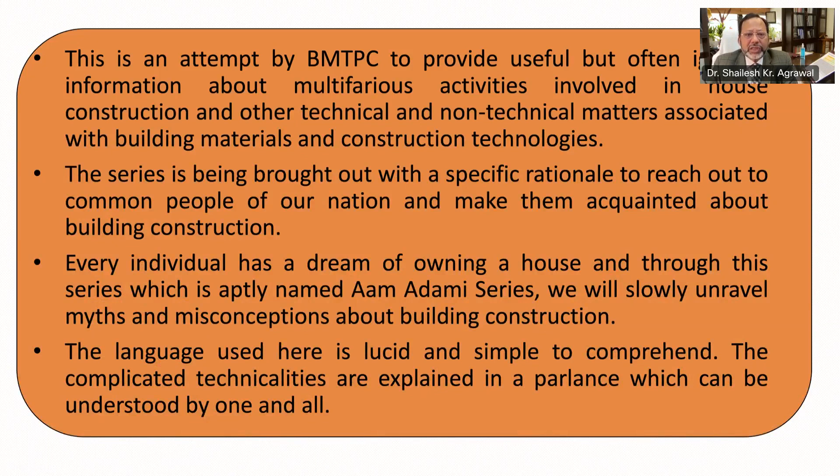Through this building digest series, BMTPC is making an attempt to create awareness about the various facets of housing construction by owners. As explained in the previous slide, construction of house is a multidisciplinary task involving a large number of professionals and non-professionals in the field of construction besides the owner. Therefore, it is important to have qualified experienced professionals on one hand, and on the other hand, supervise the work properly as it is being executed by a set of skilled as well as unskilled workers at site.

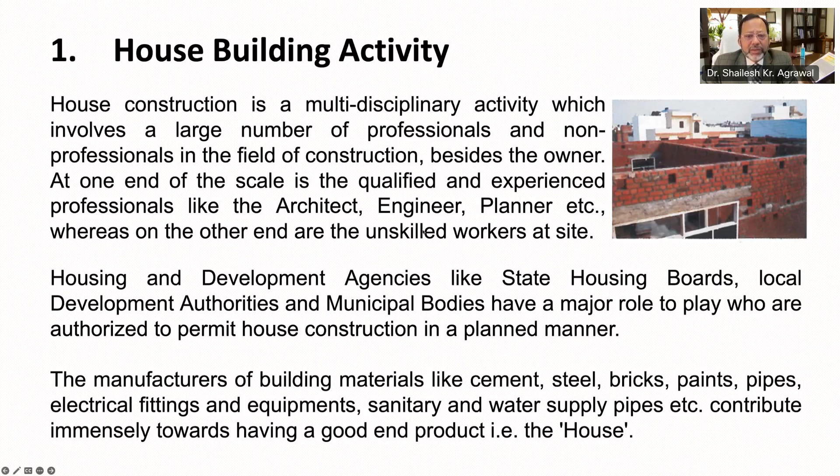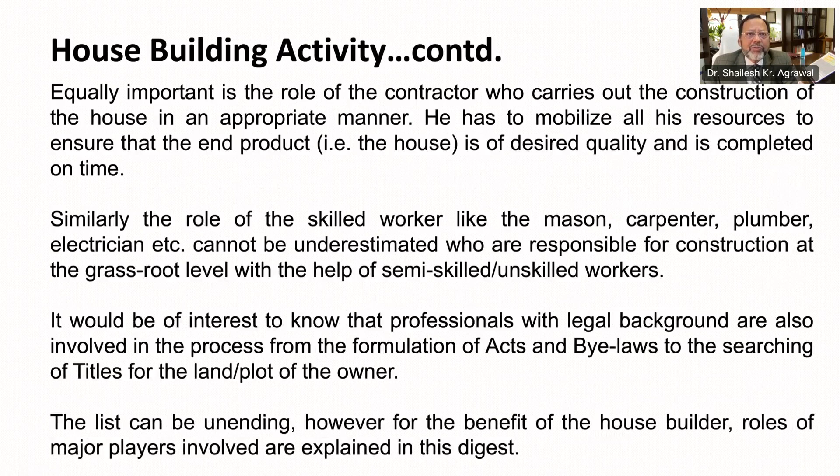Also, it is important to use good quality branded building materials such as cement, steel, bricks, paints, pipes, fittings, equipment, sanitary and water pipes, preferably of ISI mark, so as to give a good end product, that is your house. The role of the contractor, which we hire for construction, has an equally important role to play because he has to mobilize his resources to ensure timely completion of desired quality of house. Also, skilled workforce like mason, carpenters, plumbers, electricians has a very important role to play with the help of semi-skilled, unskilled workers.

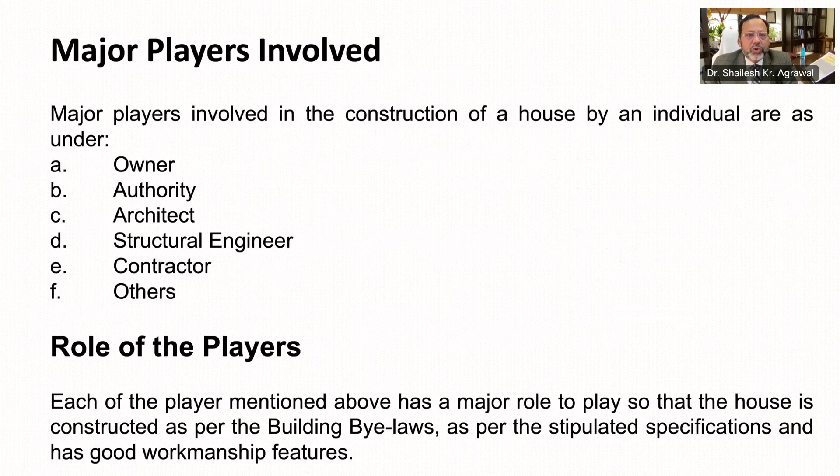Let me briefly explain each player's role to all of you. First is the owner, that is we ourselves. Owner is the key person, and therefore the owner has to ensure that he has the legal right over the plot of land over which the house is to be constructed. Also, the owner has to coordinate with all professionals and people involved right from the planning and construction stage with a view to obtain building approvals, other permits, completion certificate, and its occupancy.

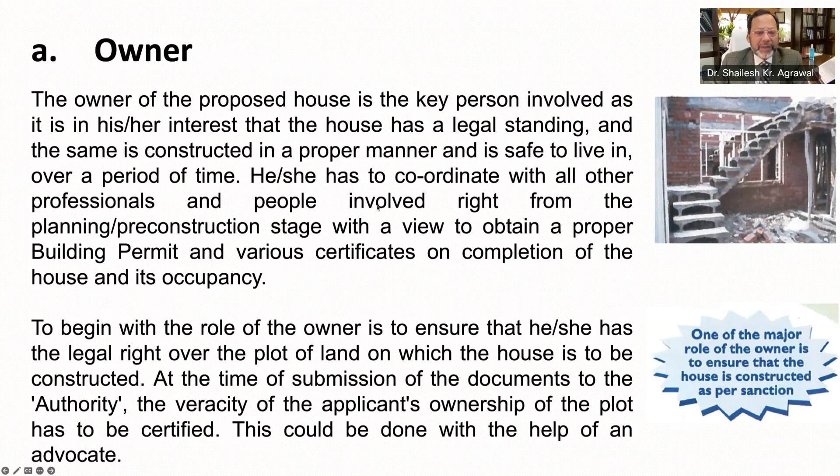The selection of architect also lies with the owner, and it is important to have an experienced and professional architect. The civil engineer or structural engineer is also required, and the responsibility lies with the owner for selection of a structural engineer. Also, the contractor, supervisor, and other personnel are required to be selected by the owner. It is important to note that the owner should ensure safety at his or her site and shall not cause inconvenience to others in terms of noise, dust, etc.

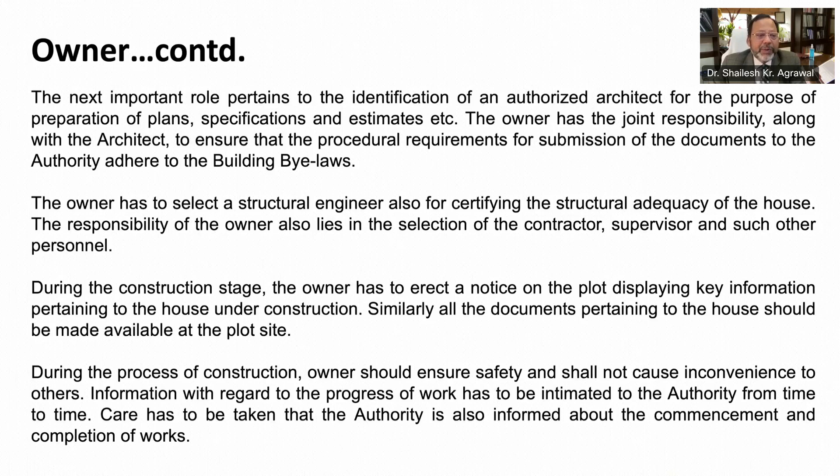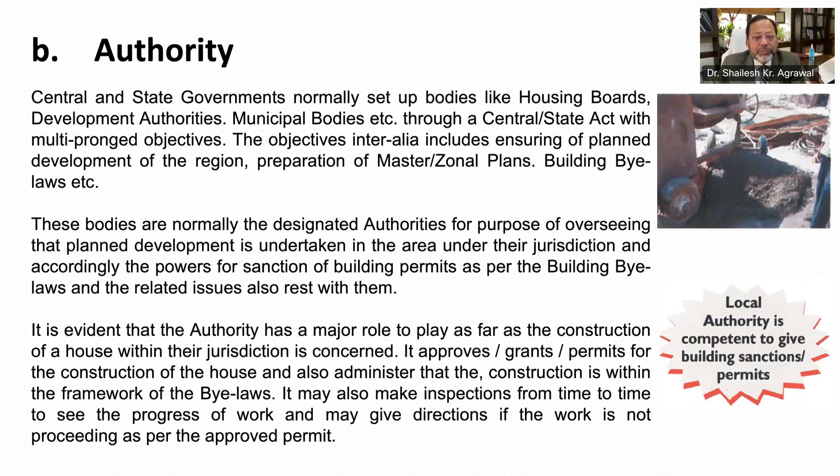The next player involved is the authority, which means housing board or development authority or municipality, as the case may be. The rules and regulations prescribed by authority need to be followed religiously. It is often seen that owners try to bypass these rules. However, let me remind you that these bodies are set up through central and state acts and are responsible for planned development of area, and they have jurisdiction and power for sanctioning building permits as per building bylaws, and at the same time issue notice to stop the work if not done in line with the building bylaws. Therefore, authority has an important role to play in construction of house. Also, they may make inspections from time to time and give directions.

To obtain a building permit, the housing plan and other documents along with fees need to be submitted to the authority. Normally, the application is scrutinized and building permit is granted within a stipulated time frame. The details of documents to be submitted, forms, etc. are easily available nowadays online.

Another important aspect is that authorities have an impaneled list of architects, engineers, advocates, construction engineers who are eligible to facilitate the construction process and sign the application and other documents along with owners. Remember, authorities are authorized to impose penalties as well if the work is not done properly.

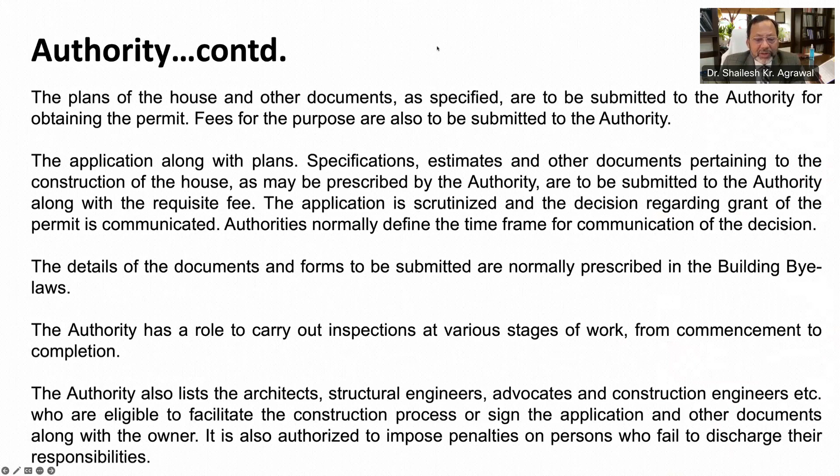The next person is architect. Architect is defined as a person who makes architectural plans and workable drawings for your house and also helps guide through the building construction and suggests different fittings, products, etc.

Architect has multiple roles to play, such as supervising the construction, preparing the plan as per requirement of the owner, and facilitating submission of application and its approval.

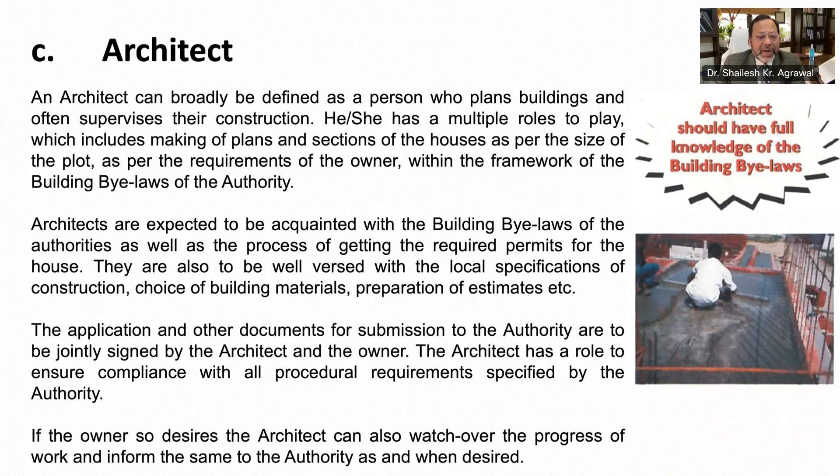The architect should also be well versed with the local specification of construction, choice of building materials, etc. Normally, ensuring compliance with all procedural requirements specified by local authorities, along with information regarding progress, lies with the architect along with the owner.

It is seen that architects normally hire civil engineers who help them carry out structural design of the house. Let me clearly tell my viewers that structural design is different from architectural design.

Architectural design is all about actual forms and shape of the house, that is plan, elevations, sections, whereas structural design is about sizes of foundations, beams, columns, slabs, along with number of steel bars required.

Normally, the structural design is done through structural analysis and is a must for making your house strong, stable, and safe from natural hazards. On account of recent recurrent earthquakes and resulting damages to houses, authorities nowadays require a structural engineer to authenticate the structural safety of the house being constructed.

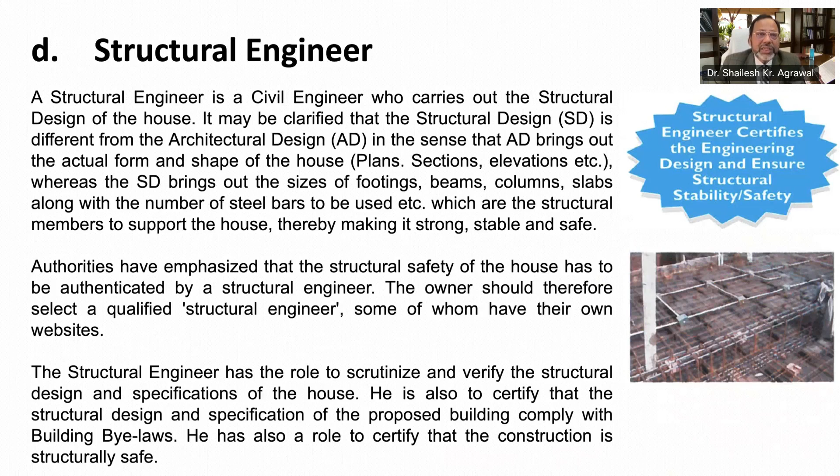Therefore, the structural engineer has a role to scrutinize, verify, and certify the structural design and specification of the proposed house, complying with building bylaws. The structural safety certificate also needs to be given by the structural engineer.

The next most important person for house construction is the contractor, who has a wide range of roles, duties, and responsibilities. He is the one who manages the construction and ensures that all necessary measures are taken which result in a quality finished product. The contractor needs to plan and carry out all the activities related to construction of your house.

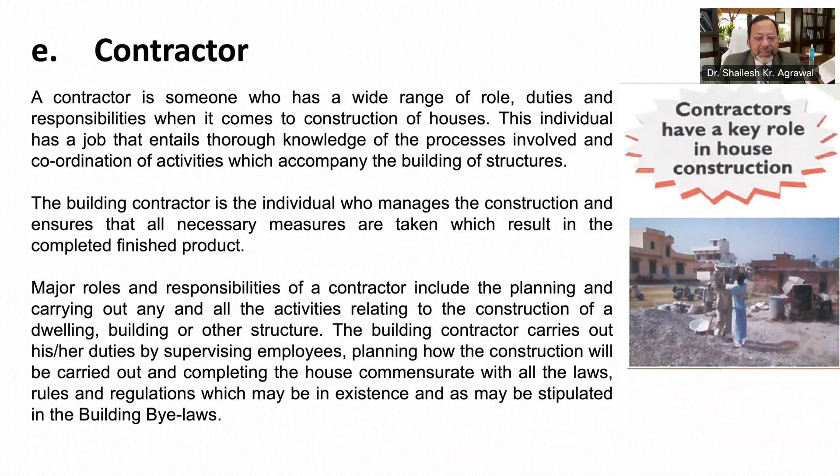He needs to supervise his employees and do the planning of how the construction will be carried out and completed in line with the laws, rules, and regulations. The most important role for the contractor is to plan and schedule the construction.

By doing so, requirements of construction material at different stages, requirement of labor, tools, plants, water, and power can be ascertained from time to time. Equipment like concrete mixers, welding machines, strainers, centering, and shuttering material are to be hired by the contractor.

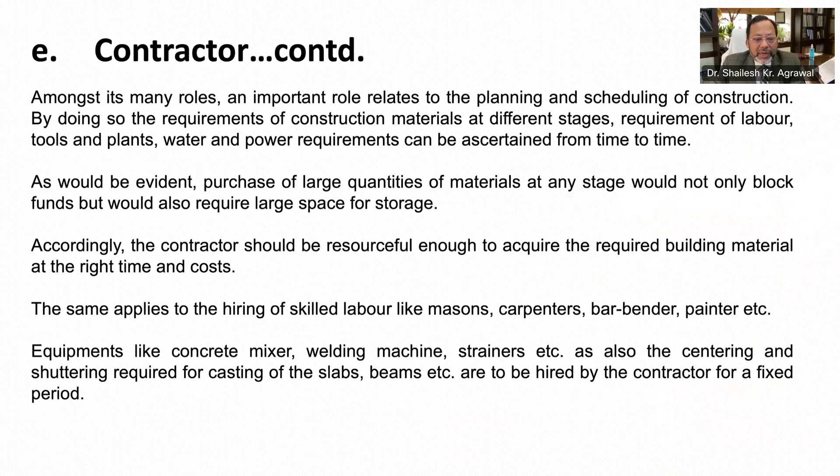Further, the materials required from time to time need to be procured by the contractor so as to avoid large spaces for storage and blocked funds.

The record of skilled and unskilled workers being employed at site is also the responsibility of the contractor. Besides, he has to ensure safety of labor during the construction process and provide temporary accommodation to them at site.

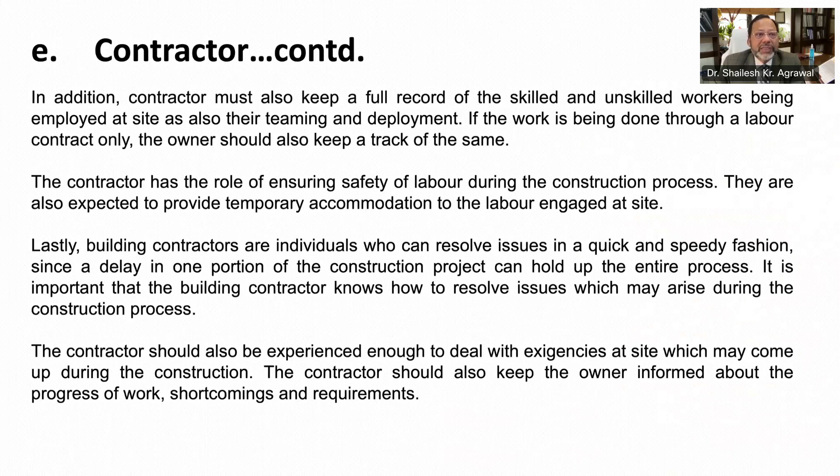The building contractor is the most important individual who can resolve issues in an expeditious manner, as delay once will delay the entire house construction. Besides, the contractor should be experienced enough to deal with exigencies at site.

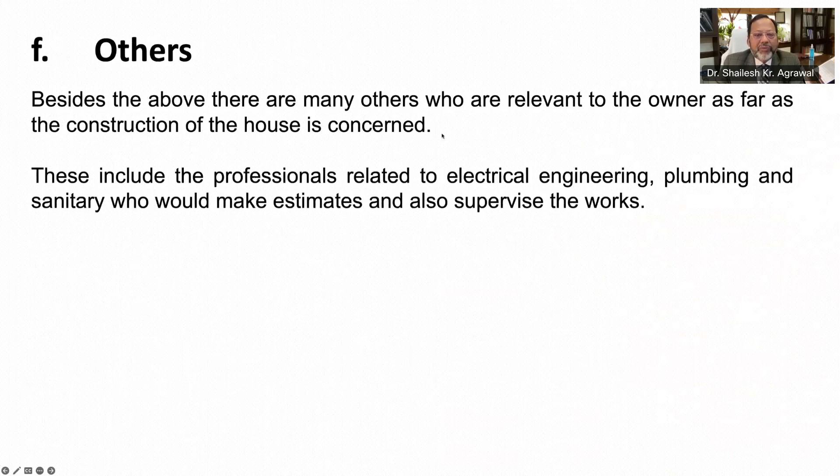There are many others who are relevant to the owner, such as electrician, plumber, sanitary expert, supervisor, security personnel who help in timely completion of your house.

As explained through this digest, there are a large number of players involved in construction of a house, and each one of them has a specific role to play. However, the roles may overlap, but the owner has to coordinate effectively in order to get maximum returns of the money spent.

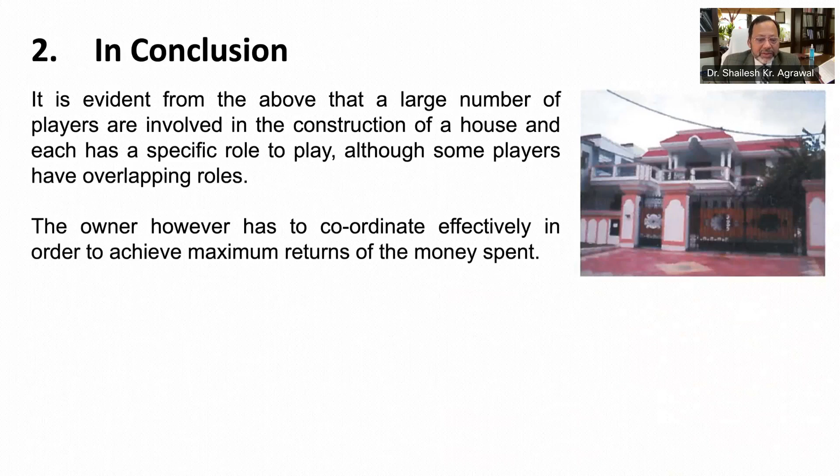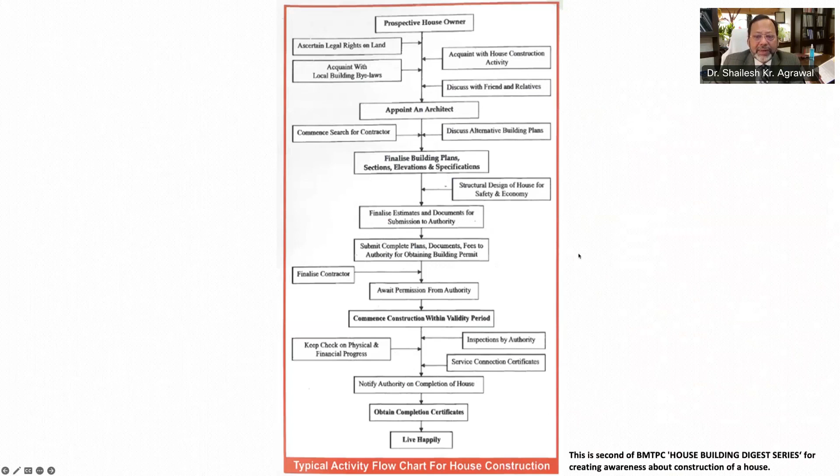Commence construction after obtaining the building permit, keep check on physical and financial progress, and obtain completion certificate when the house is completed, and then occupy the house and live happily.

This building digest number 2 could throw light on different players involved in house construction and can be downloaded from www.bmtpc.org. The next topic to be covered will be procedures and terminologies.